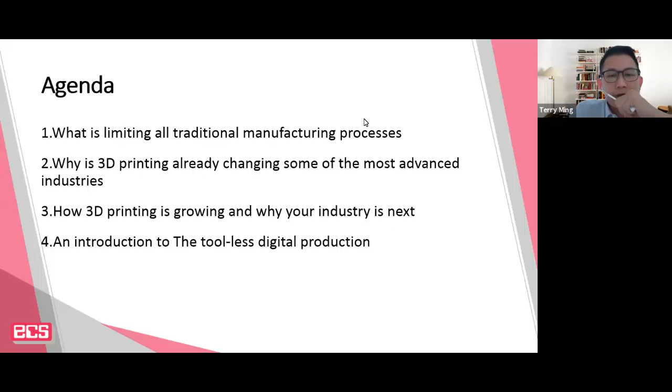Okay, nice. All right, so to begin, let me do a very brief introduction on the company profile. ECS has actually started since 1982, and we have been providing a comprehensive range of world-class CAD/CAM/CAE solutions to the manufacturing, aerospace, marine, and offshore industries, mold makers, and many others.

We started our 3D printing business way back in 2008. In 2017, we did a very drastic change - we restructured the whole business offering, focusing just on 3D printing. As I'm speaking now, in 2020, after 12 years of involvement in 3D printing, we have expanded our presence across ASEAN and started office operations in Thailand and Indonesia, as you can see on the screen.

Without further ado, together with me is Omar. He will be the presenter for today. He is an application engineer who specializes in assisting customers across all industries to integrate additive manufacturing into their current workflow. Okay, over to you, Omar.

All right, okay. Thank you, Terry. Thanks so much for the introduction. Good morning everyone, hope you're doing well. So as Terry has mentioned, we will talk in this webinar about 3D printing and how it's changing the way we do things.

It's very good that we did the poll in the beginning, and we thought about starting from the basics, trying to understand what 3D printing is, trying to understand how it came about, and what makes it different from most traditional manufacturing processes, and why people talk about it these days. It's good that the majority have a basic understanding of the technology, and this is very understandable - at the end of the day, this is a new technology.

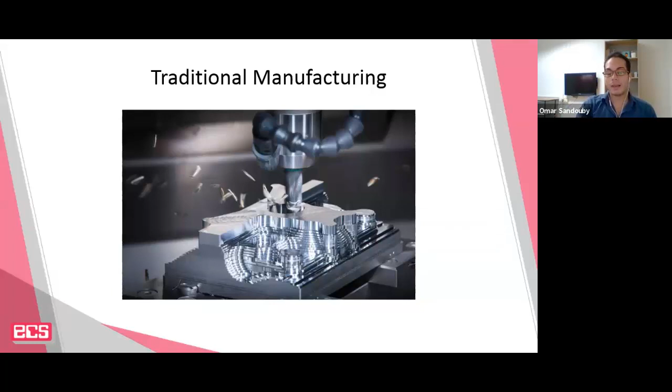So for me to better define what 3D printing is, we have to first understand how manufacturing or mass manufacturing is being carried out, what processes are being used, and what shortcomings we see in the manufacturing industry that we can find a place for 3D printing to complement and overcome. If you were to talk about traditional processes, I just listed here 4 of the main ones that we see in many industries.

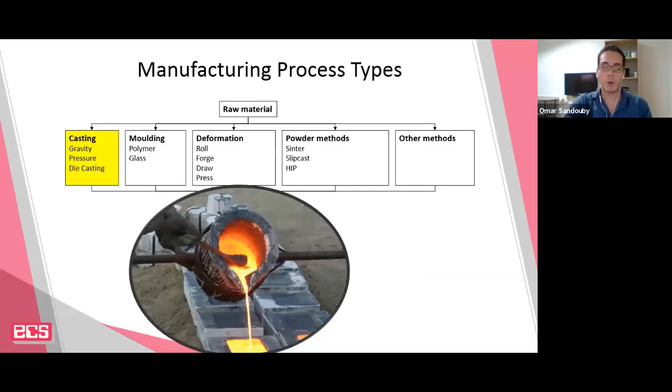For metals, we do something such as casting, whereby you pour the liquid molten metal inside of a mold. For glasses and polymers, we mostly process them by molding, whereby you build those molds to create the shape. Then sometimes we have to do something such as deformation - processes such as rolling, forging, drawing, or bending.

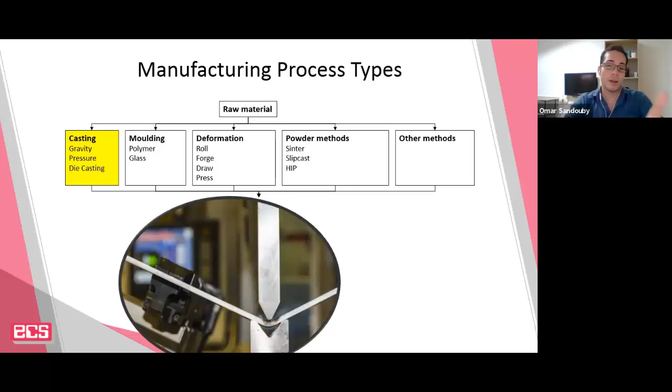And sometimes we also use powder, again used in metal. This is important, and that's why I have it here, because we'll come back to that later, whereby you create the shape in powder and then you sinter that inside of a furnace.

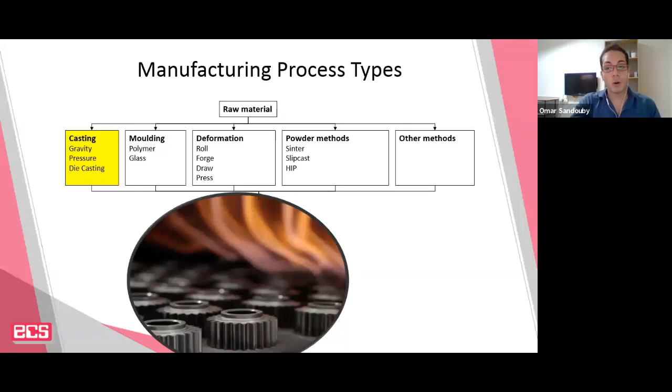But this is just the primary processes that we do in most of the traditional manufacturing processes. Of course, there are many other processes, but those are the commonly used ones.

So after that, we have a very famous one, which is machining. In machining, you need to cut the part, maybe drill it. So in case of, let's say, smartphones that have an aluminum casing, once you have the rough shape, you have to do machining.

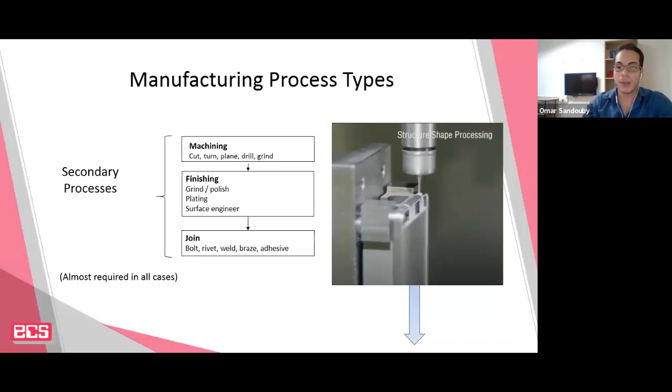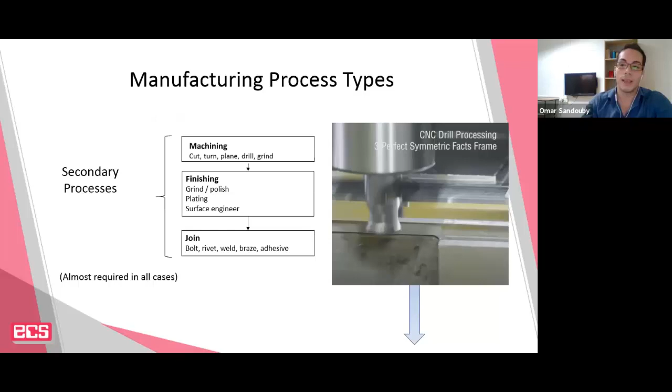And then after that, you start to do finishing. A bit of grinding, maybe plating - all of those steps are needed for you to attain the aesthetic requirements of the part, of what the consumer product would look like, as well as to attain the mechanical properties that make this casing functional.

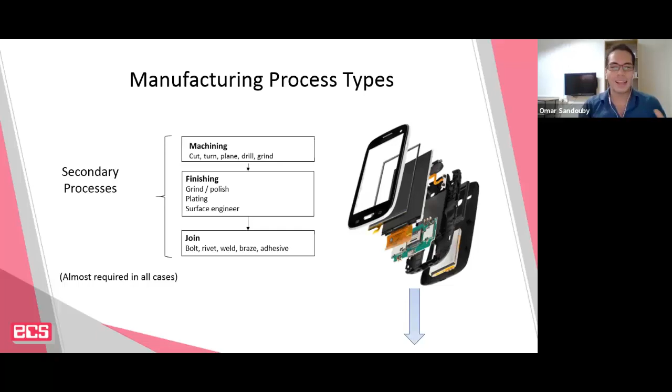Of course, any mechanical components are being manufactured separately, and then you have to go on and join them all together in what's known as assembly. So roughly all manufacturing processes look something like this. If you're talking about plastics, metals, or ceramics, they have to be processed in a way quite similar to what we just highlighted.

If you think about the visuals I just showed, like the casting process or molding, maybe bending, you'd see that all traditional manufacturing processes, anything that we manufacture, have to utilize molds and tooling to create the geometry. There is no way you can create the specified shape of a plastic part without having a mold. You have to have a mold.

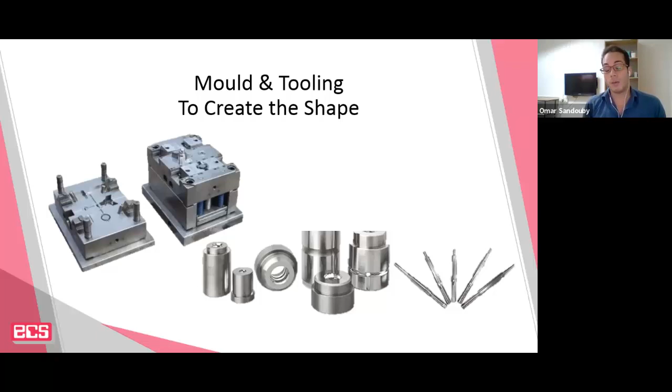So some may ask, okay, what are the issues with using mold and tooling? We've been using those for the bigger part of history. Any sort of manufacturing, even from early civilization all the way up until now, has been utilizing and capitalizing on molds and tooling.

Of course, mold and tooling manufacturing also became much more advanced. In the early days, milling machines used to be manually operated and the tolerances were not so great. Now we have state-of-the-art CNC machines that can go into nano machining, giving you very high precision with very tight tolerances.

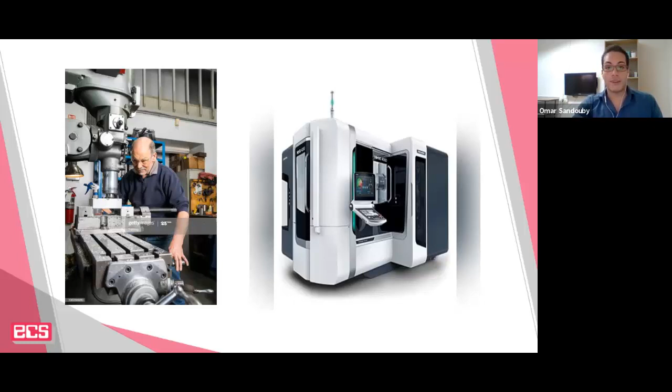So precision-wise, traditional manufacturing has expanded massively in this area, but there remain some constraints and drawbacks when it comes to molds and tooling. And those constraints, in turn, give you the same drawbacks for all traditional manufacturing processes.

Firstly, we have design constraints. We have the problem of longer lead times. We have another issue that tooling is quite expensive, and that leads to supply chain complexity. In the next slides, I will go in depth a little bit more into what causes those issues.

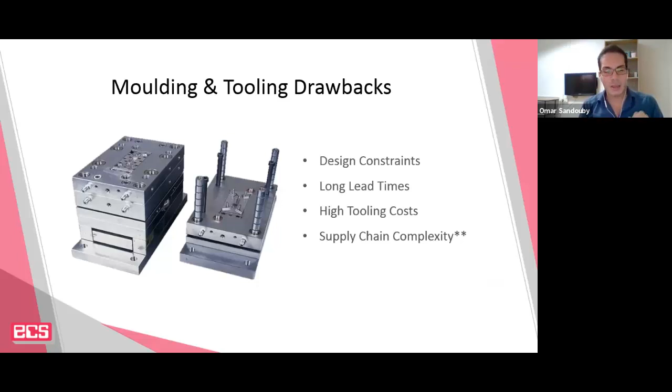When it comes to design constraints, if you were to do any mechanical engineering course, you'd have to spend at least 2 years to wrap your head around the idea of design for manufacturing and assembly. So if you're a designer and you have the best design in the world, if this design of yours cannot be manifested into something that can be manufactured and assembled together, then your design is no good.

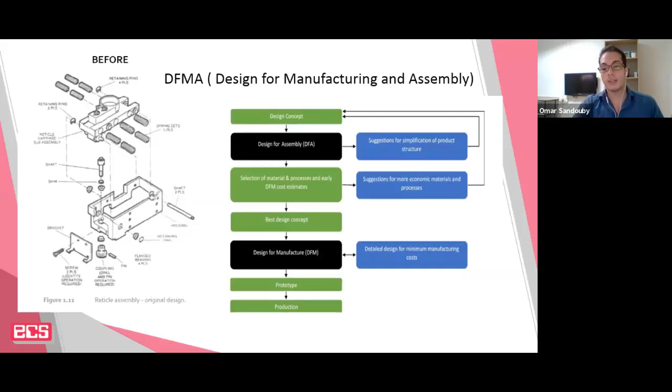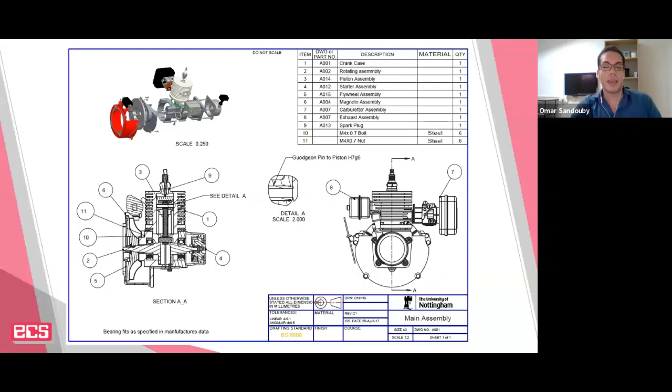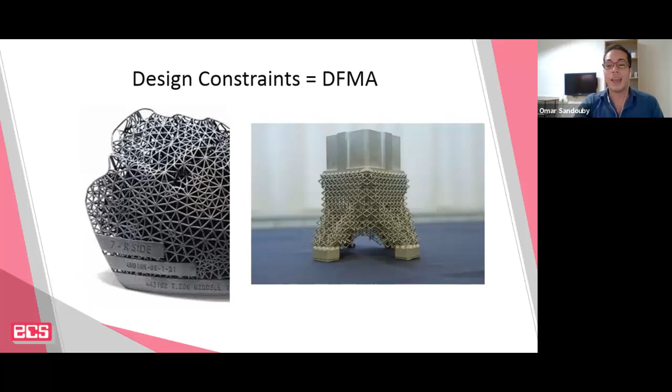And of course, this ability for you to do an assembly or to produce something manufacturable imposes a lot of restraints on your design. For instance, if you'd like to build a very complex shape, such as a topology optimized shape, there is no way you can do this with any traditional manufacturing processes, because at the end of the day you're restrained. You cannot machine, or create a mold, that would create such a complex shape. So this is where design constraints come about.

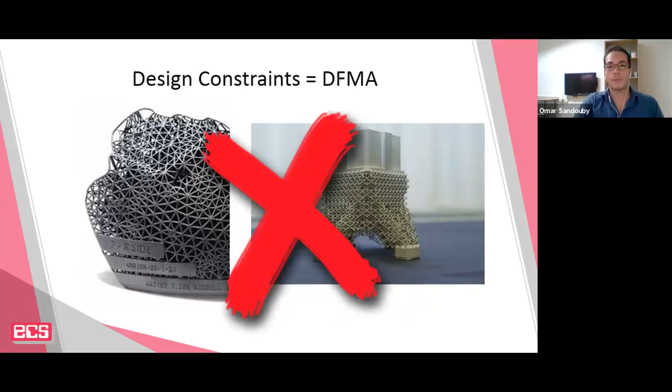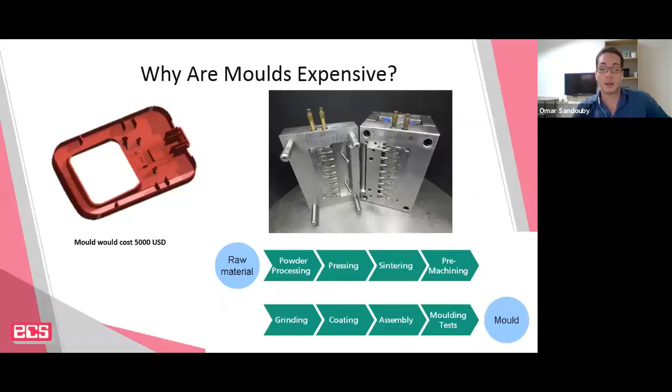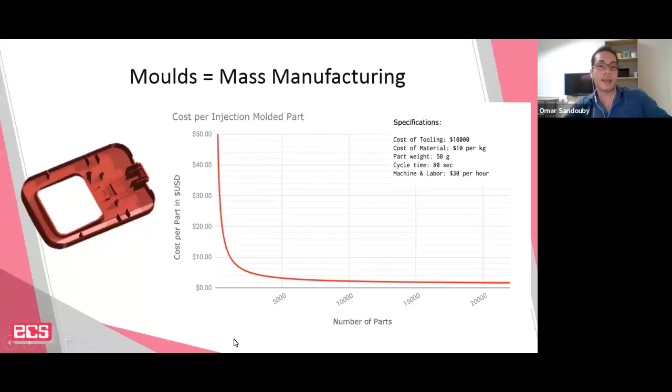So perhaps this graph is what you also see for many mass manufacturing processes when it comes to their pricing. You see this exponential decay. If you're talking about low volume production, the pricing per piece is quite expensive, and it's only worthy of going into full-scale production to attain the good, cheap pricing when you, in the case of this simple part, exceed the 5,000 part count.

And this is what the composition looks like to make it cheap. This part can, based on the information you can find, cost you maybe around $6.40, and you see that the cost is predominantly that of the mold. It's only worthy for you to go into injection molding when you talk about 500,000 parts. Only then do you see the drastic change, with the part price reduced to almost 40 cents.

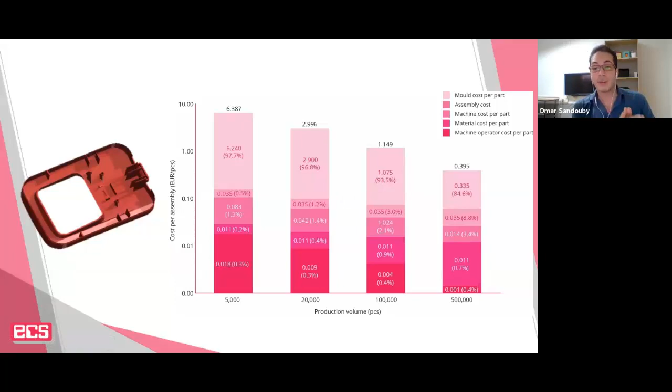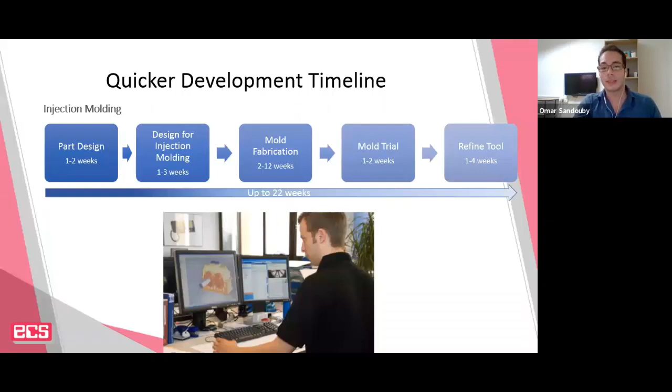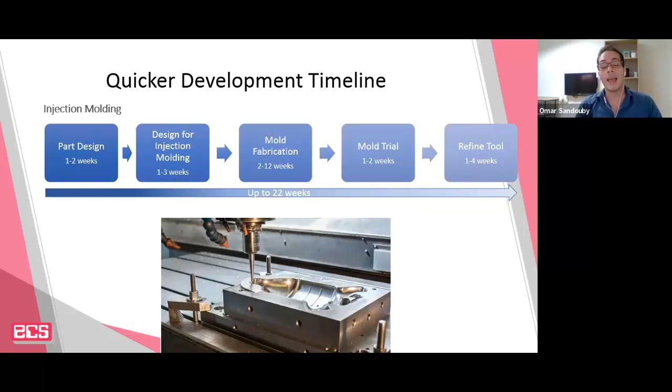And then that's not all. You have to design the mold. This is a more complicated step for you to take. Then you start with the mold fabrication. And we've seen the steps. You start with powder, you start with machining. It's a manual, labor-intensive process, and it's quite expensive.

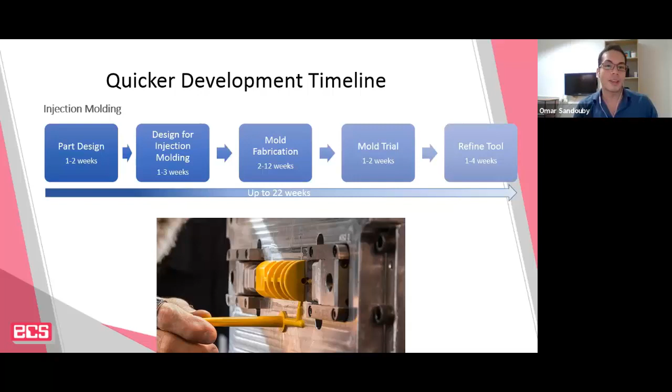Then you start to do some trials, because in many cases, when you go into injection molding, the shape that you create is actually created by the tooling and not created by the part design. So the shape can have discrepancies between what comes out of the mold and what your customer has in mind. And this opens the door for iterations or refining of the tool. So you need to undergo many iterations or do some adjustments.

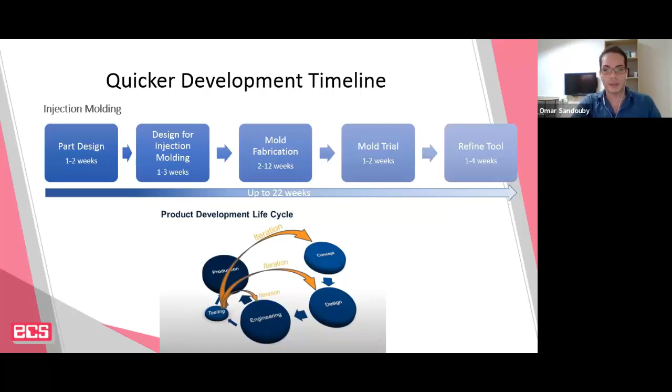And in some cases, you have to maybe throw away the mold that you've built and start building a new one that costs you maybe $5,000 again. So the whole timeline to develop and run a project in injection molding, if we're talking about a complex part, can take up to 22 weeks. And this is quite a lengthy time. Everybody knows that if you want to go into injection molding, this is the lead time you're talking about. So we've seen some of the issues that come about in traditional manufacturing.

So what about a process known as 3D printing? This process starts off in the very same step as any traditional manufacturing process, or in this case, injection molding. So you need to do a part design. And from there, once you have a 3D model CAD file, you can directly print. All you need to do after that is some minor post-processing, which in plastics can take maybe 1 to 2 hours.

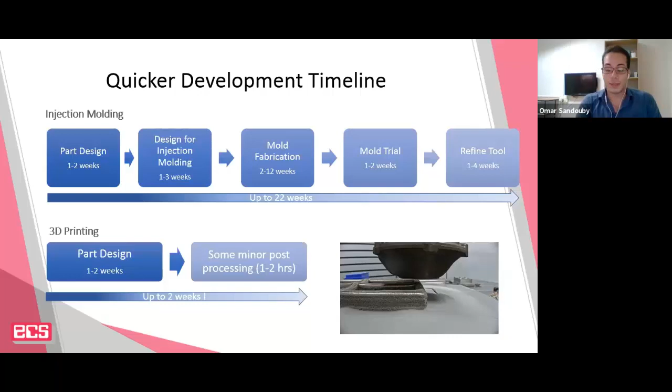So just to give you the book definition of what 3D printing is: it's known as additive manufacturing because it prints or builds a part layer by layer in an additive process. Right now in 3D printing, we have the ability to use metals, plastics, ceramics. So most of the commonly used classes of materials that we have can be 3D printed.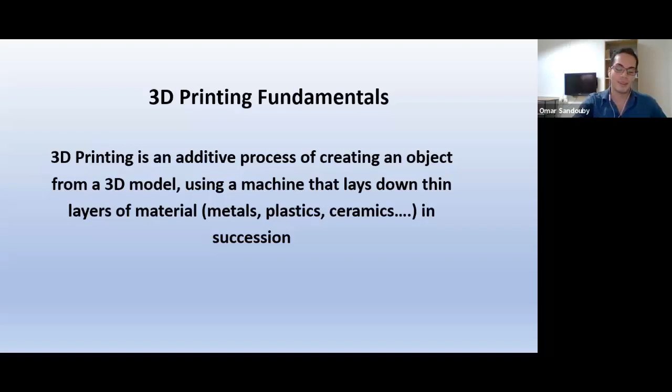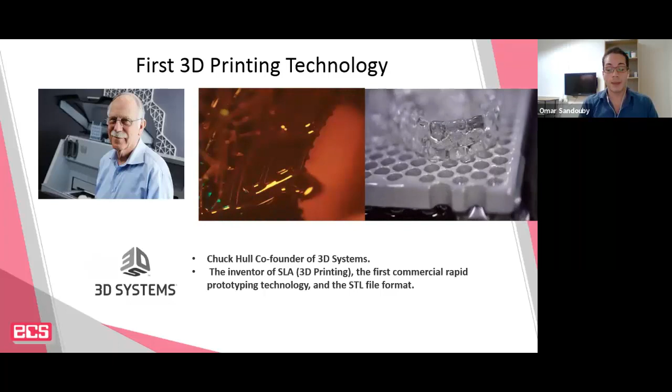Perhaps we have to also talk about how 3D printing came about. The idea of 3D printing was first introduced, I guess, around the mid-80s by this guy here named Chuck Hull. He used a thermoset, which is liquid resin, and cured it with light to be able to create the shape layer by layer.

So how did it come about, and what actually inspired him to go on and do 3D printing in the first place? The industry at the time did not have a similar technology. And what inspired him was how hard it was for designers to go on and do any prototyping.

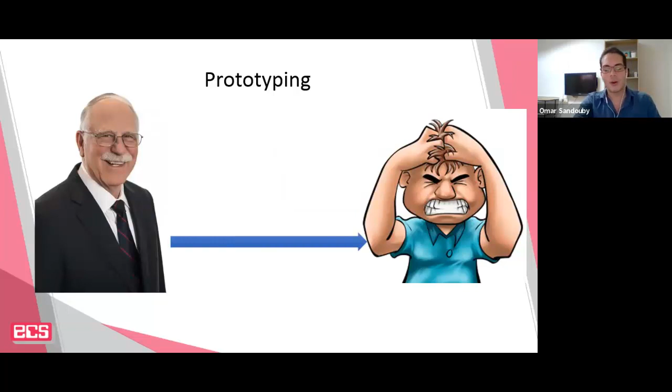We've seen how hard it is, it takes maybe up to 22 weeks to run an injection molding process. Imagine you're a designer and all you need to do is come up with some different concepts, physical parts, to do some verification before you go into production. It doesn't make any sense to go and run an injection molding program just to get those parts, because that part will cost maybe $5,000, $6,000, depending on the mold.

So what designers used to do back then, and Chuck Hull used to be one of those designers, he used to work in a furniture company, is he would need to go down and get the styrofoam and start machining it, or using whatever subtractive techniques he could, and add a bit of color so he could manifest those concepts into an actual product.

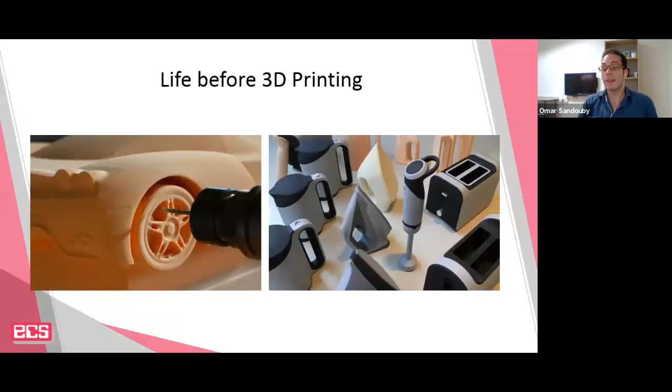Now, the process was very lengthy, very tiring and hectic. And therefore, Chuck Hull said, okay, now we have 3D models. That was about the time that 3D models and the idea of CAD-ing started to appear with computers.

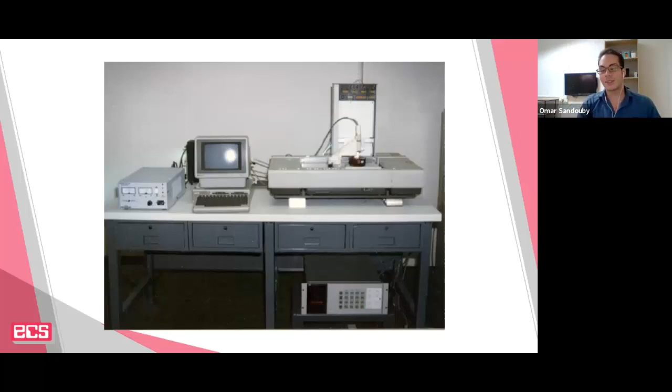So he thought about attaching or building this SLA printer, as you see in the picture, putting it next to his computer and starting this additive manufacturing technology. You might have come across those terms before: rapid prototyping, 3D printing, additive manufacturing. It's all talking about the same technology.

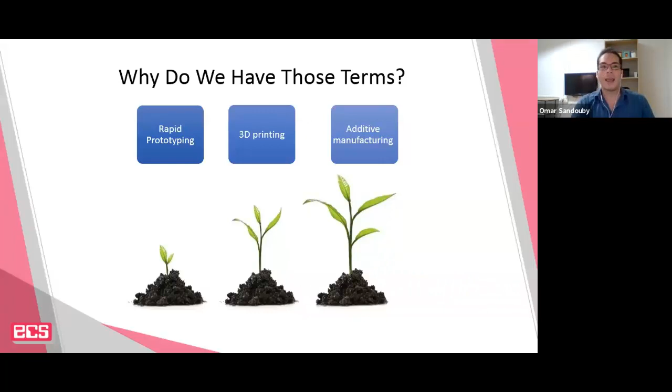For the bigger part of its history, from its first introduction by Chuck Hull all the way up until, I guess, maybe 2012 or 2013, it used to be known as rapid prototyping because it emerged for prototyping, and it was not intended to go into additive manufacturing or any manufacturing process. But what made this technology actually evolve, we will talk about later, and we will see why it's now a standalone type of manufacturing.

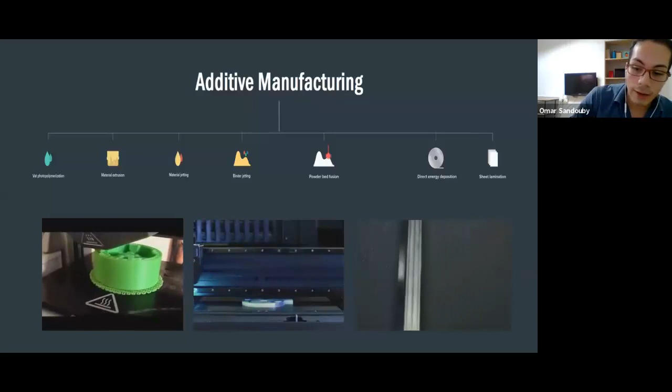3D printing has come a long way since the 1980s. We now have probably 7 main different technologies. Some use powder, some use resin, some use solid. I'm not going to talk in depth about the differences between those technologies - things like material jetting or powder bed fusion. We'll keep that for a future webinar, because every single one of those technologies complements 3D printing in a way and has its uses in applications. For this one, I'll just focus more on the toolless digital production coming up next, which uses resin printing.

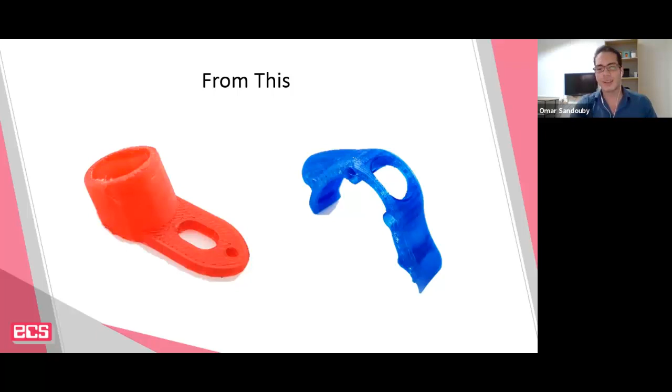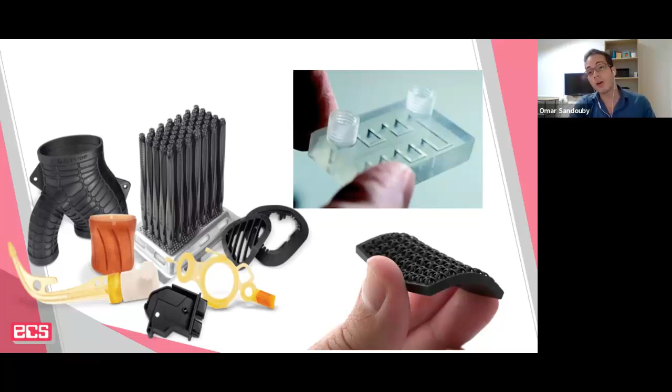So the whole suite of technologies in 3D printing was able to transform it, taking it from a place where parts used to look like this - not very nice looking, couldn't go into much engineering related fields - to parts that are functional and can go into very advanced solutions. You see here things such as microfluidic chips that go into the medical industries, or textured parts that look like injection molding. The technology has come a long way in the past 30 years or so.

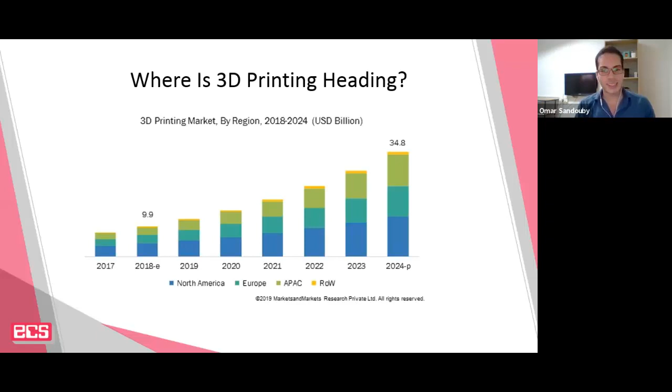This is also represented by how we see the total revenue of this industry growing. In 2018, it was reported to have a revenue of around $10 billion, and it's now projected to go up to $35 billion by 2024. So in just 6 years, you're talking about more than 300% increment.

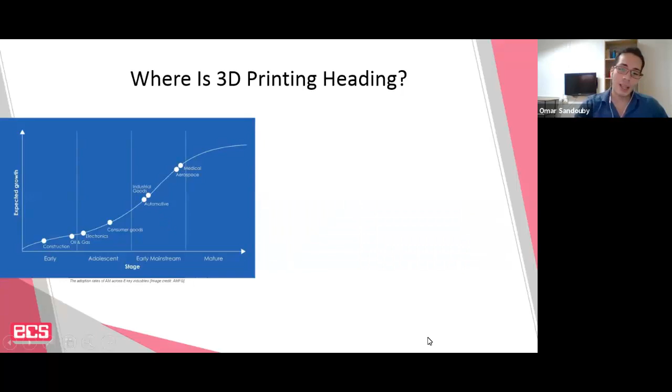That's a massive number, and I wouldn't say the technology is by any means mature when it comes to its adoption in different industries. But we're starting to see better trends in advanced manufacturing technologies such as aerospace and medical. We can also see good adoption in automotive. It's not uncommon - and this is quite recent, from January 2020 - that Boeing, or GE, which is also one of the big players now in the 3D printing realm, have 300 3D printed parts inside their latest engine, the GE9X that goes into the 777X.

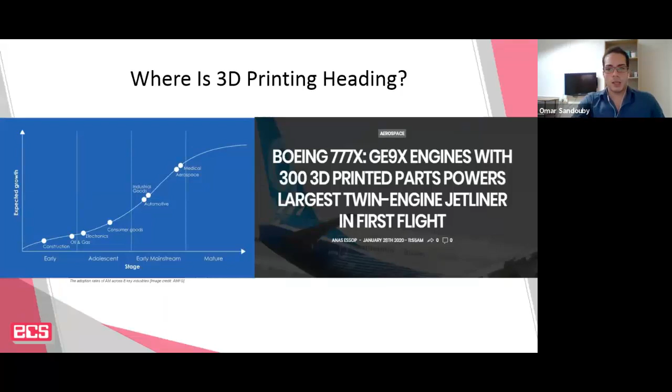So what makes 3D printing lucrative and attractive for those advanced manufacturing technologies? Perhaps the way I see it, what makes it quite important for them is that they can finally break out and remove the restrictions from design for manufacturing and assembly that we talked about, and utilize what is now known as design for additive manufacturing - the ability to design the part for its specific purpose.

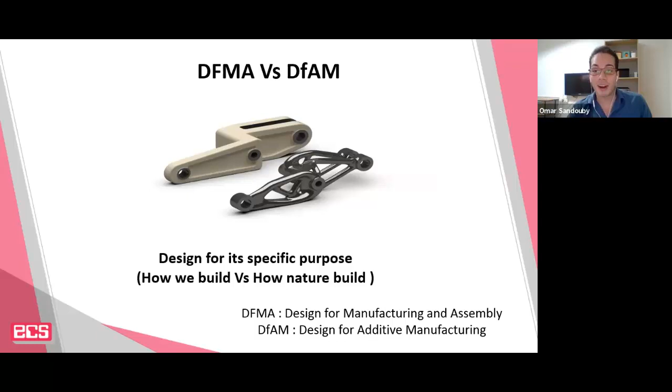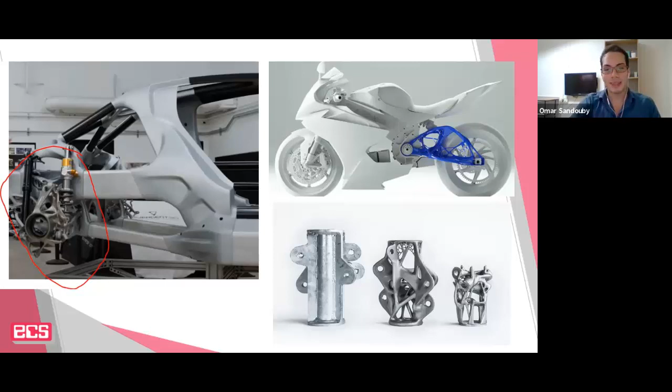The same trend is now being used in automotive and motorcycles - again using topology optimized structures that mimic what is known as how nature builds, in a way. Nature builds differently than how we build in traditional manufacturing. If you think of trees or our bones, for instance, they are extremely light - hollow from the inside, yet quite strong. The ability to print those structures - only 3D printing or additive manufacturing is a technology that can be used to attain such complex structures.

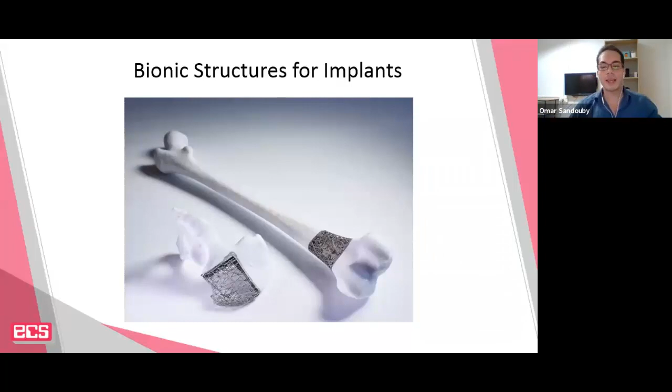And we see this in medical implants, whereby the parts or the bones that you build mimic what we have inside of our bones and have maybe lesser rejection rates for patients. And that's why generally we see aerospace, medical, automotive starting to utilize 3D printing.

So what about plastic parts? It's true, the technology actually emerged in plastic manufacturing. The very first technology we had was SLA, which uses a laser to cure liquid resin. But in my opinion, the technology didn't have much impact when it comes to production of parts. It's always been stuck at the prototyping step. When it comes to production, people don't go around and use 3D printing. But this trend has finally changed very recently.

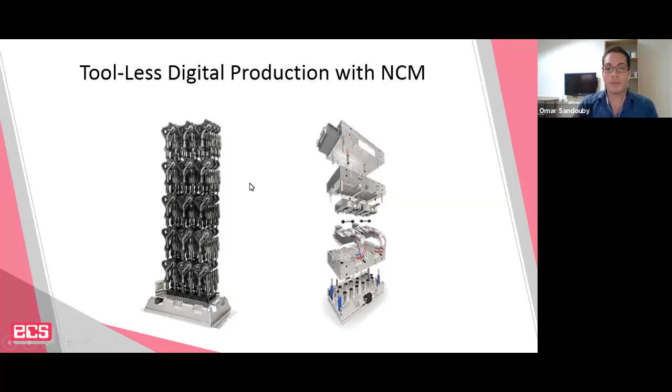Now we have something known as toolless digital production. That's the main trend I want to talk about today. It's the ability for you to stack up parts, build maybe hundreds in a very few number of hours. This video would be a very good representation of what the technology is able to do.

So you see here, again, it's using liquid resin, and the parts are being pulled outside of that resin at a very high speed. All of those parts are actually injection molded-like when it comes to their properties. The reason we're still using resin on the Figure 4 platform, or the non-contact membrane technology, is that the resin, compared to powder bed based systems, allows you to have the looks and feel of injection molding. So you can have smooth finished parts.

We can also see that the manufacturing solution comes along with scalable options. You can have up to 24 building chambers all running at the same time. So imagine if you have just 10 building chambers, you can print up to 1,200 functional parts in 5 hours. That's astonishing.

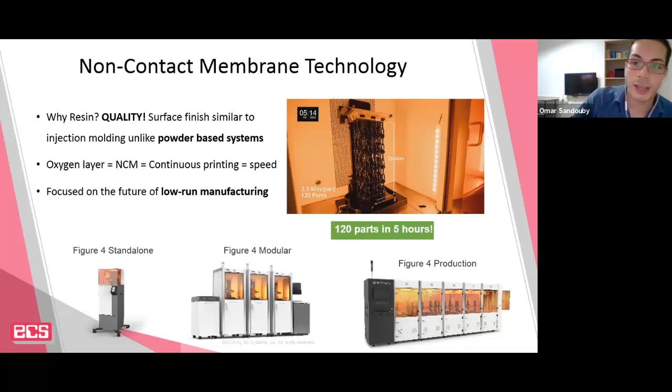And you may ask me, okay, was it just speed that was limiting this resin technology from going into production? I mean, we've had it for 30 years. You could say, okay, sometimes you need to roll out a product in limited edition, you might just need to have 50 or 100 parts. So why were not people using resin back then?

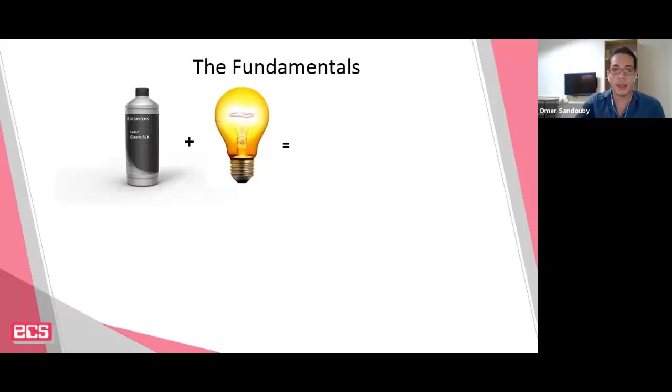The reason for that is that the fundamentals of how any resin printing technology works is pretty simple. You get a liquid resin, you cure it with light, and there you have it, your physical part. So the chemical reactions look something like this: the chemical compound of the resin would have those monomers, oligomers, and then the whole reaction is initiated by UV light to create interlinks between the photoresin that allow the part to solidify.

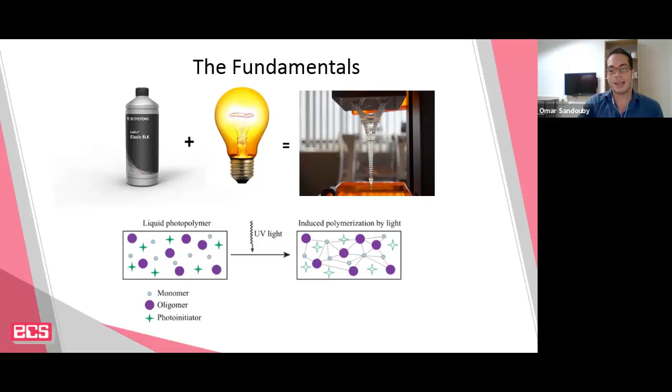So this perhaps is a good analogy, same as maybe the sun and our skin. A little bit of sun is good, allows us to grow, gives us vitamins, but extended exposure to sun is not good. Same thing for parts that are built with resin. If you've printed a white part before, you tend to see the part decolorize, turn a little bit yellowish after some time, after maybe a few months. The reason is that extended exposure to UV degrades or weakens those links, and the part's mechanical properties start to degrade. So the part is not really very much reusable.

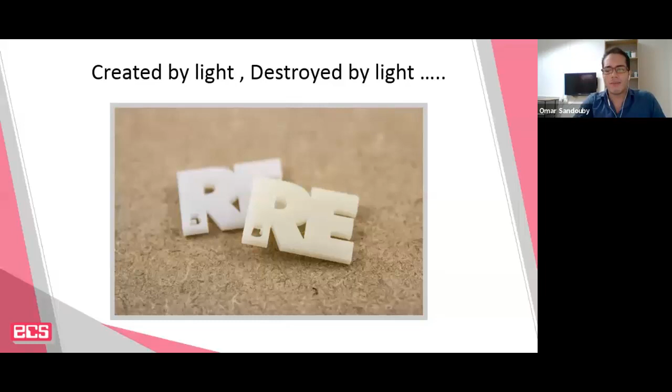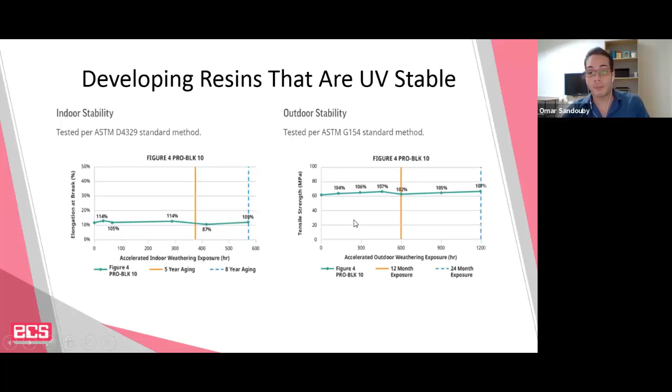But 3D printing now has evolved, and newer resins have been developed for this non-contact membrane technology. You can see here a good test whereby an aging process was done, looking at elongation at break, or tensile testing, at the 2 year, 5 year, and 8 year mark. You can see that the properties of those parts are holding up for up to 8 years of aging.

So you no longer need to worry, those parts are very similar to injection molding. They can go into most end-use applications.

And perhaps one of the good things about using this toolless digital platform is that the same printer can allow you to do concept and drafting, think of it as the very early stage type of prototyping, just to build the part and visualize it. Then you can also take it to the next step, you can have parts that mimic what you get on injection molding. So if you need to do functional testing, snap fits, some assembly, you can do that with this technology. Then it goes all the way to directly producing production parts, same as what we've seen in the video. So those parts are certified and can go into end-use applications.

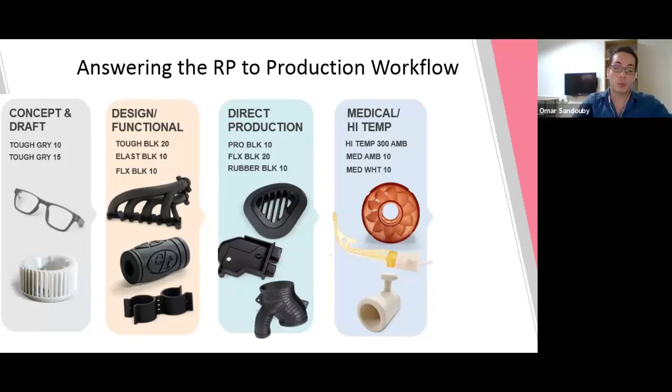3D printing can even go into more stringent requirement industries, such as medical. For medical applications, you have to sterilize the parts at maybe 100 degrees Celsius or above. Most resins developed up until about a year back didn't have the ability to withstand such elevated temperatures, but now it's possible with new resins that were developed.

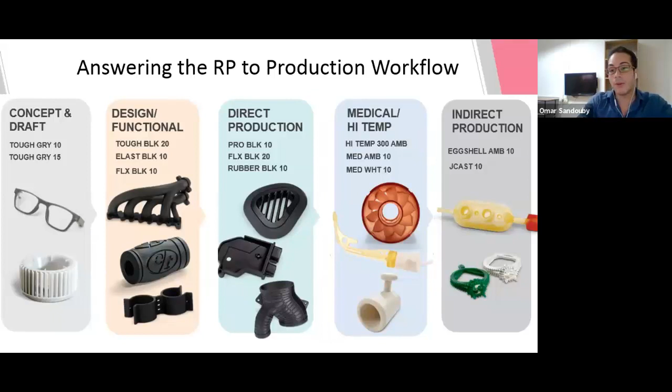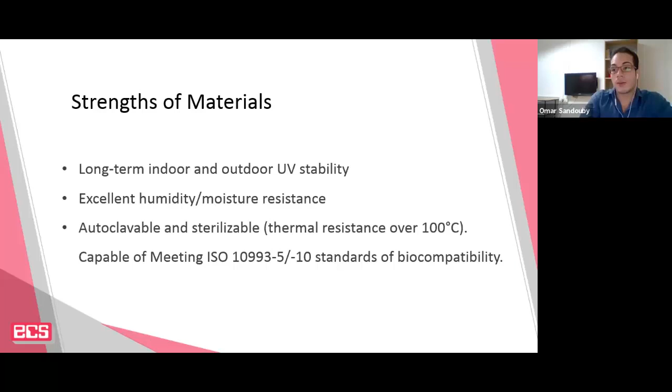You can also use it to do casting patterns, maybe for silicone or for metal, so you can see the flexibility that comes with this 3D printing technology. Some materials have excellent UV stability, can go into humid conditions, are ISO standard certified, and can go into thermal applications. So they're very similar to what you get with injection molding.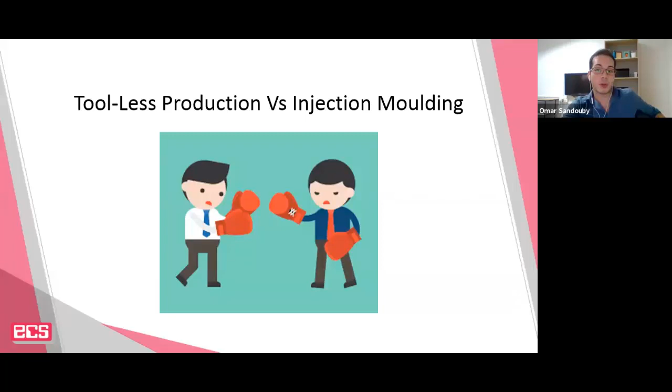A good question now is, comparing this to injection molding, what do the numbers look like in a direct comparison between toolless digital production and injection molding? 3D Systems ran this survey. They chose one part, like an AC vent for a car, and gave it to contract manufacturers who do injection molding, and they came up with this figure.

When it comes to tooling design, you no longer need to do that in 3D printing. No time is spent, and the labor cost to build the mold on traditional injection molding is around $4,000, compared to just $121, which was the money spent for a designer to prepare the file. In as quickly as 92 minutes, you can have the very first part ready for end-use application.

Compare that, and this is quite a simple part, to 15 days to get a part by injection molding. For 500 parts, the pricing per piece is actually cheaper than injection molding. It's only worthy to go into injection molding if you're talking about maybe 10,000 parts, where the pricing would be like $1.30. So with 3D printing, the pricing stays the same regardless of quantity.

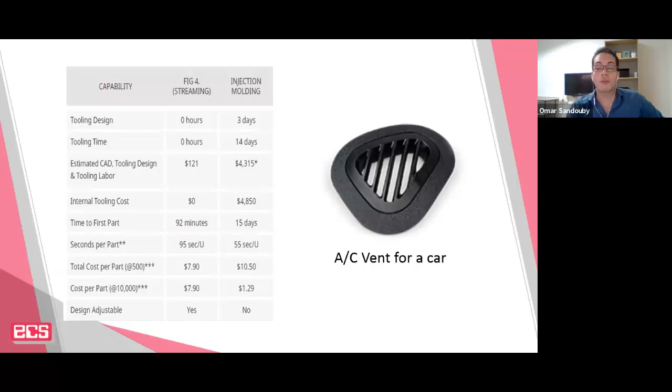You have the ability to adjust the design, customize it, and apply all sorts of different textures at no additional cost for virtually all parts printed. So the key advantages, to summarize, are lower costs. You no longer need to build tooling, employ someone to build it, and spend the time, resources and money. Overall it lowers costs.

It allows you to tap into the complexity of DFAM, design for additive manufacturing, that we've seen in aerospace and biomedical industries. Like those industries, you now have the flexibility to design unmanufacturable parts. It allows more customization for your customers. And this one is very important: the elimination of physical storage.

The supply chain of any traditional manufacturing process is quite complex, because traditional manufacturing is only worthy if you're talking about hundreds of thousands of parts. When you produce that many, you need to store them physically in a warehouse. But when you can print on demand, you no longer need to store any of those parts, you just print them on demand.

Another key advantage of using 3D printing in production is that many parts, especially aerospace parts, can be an assembly of 20 parts all reduced to one single part directly printed. We've seen in earlier slides how there's always a joining or assembly process, because mechanical parts come as a system that has to be assembled together. But in 3D printing, you can eliminate this step altogether and simplify the process.

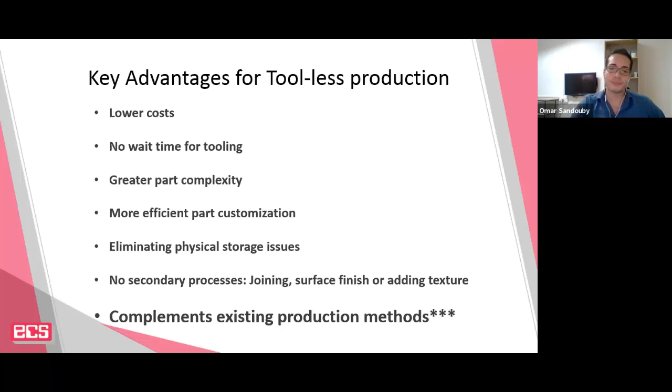I believe this is also important to highlight: this technology isn't just a standalone manufacturing technology, it also complements existing production methods. So you could be a contract manufacturer who only produces parts for a customer at, say, 1 million parts, and isn't interested in winning over the low volume quantity of 500 or 1,000 parts.

Because think about it, simple math - when you exceed the 500,000 mark, you're talking about 40 cents per part. So if you were to sell a million parts and cap it at $1, that's about $1 million worth of revenue. That's big money for contract manufacturers.

The thing about these days is that you're no longer just competing with your local rivals. We're living in a globalized world where your customers can go overseas to China, Philippines, Vietnam, or whatever country, and have the same project run over there for maybe half the price. So the only way you can win deals is by reacting fast.

That's very important. So I'll conclude this presentation by showing one case study we just ran with a customer here in Singapore - a medical company related to COVID-19, where they were engaged by one of their customers and asked to start producing thousands of parts.

But in the beginning stage, our contract manufacturer had to develop the design. So they came up with 6 different designs in this case, and needed to deliver functional parts as quickly as possible to test them on patients, so that if they developed the correct design and their customer was happy, only then would they sign the deal to go into production of 1,000 parts per day.

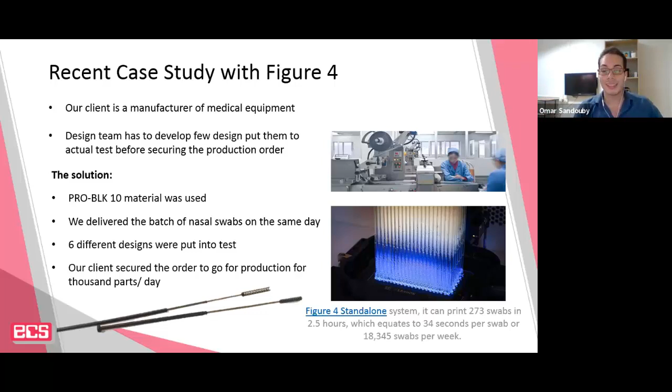And on the same day, once the design was verified and everything was good, they managed to close this deal and win the production order.

So this, I believe, gives you a bit of understanding of how 3D printing came about, where we see it in the industry, and where it complements some of the traditional manufacturing processes.

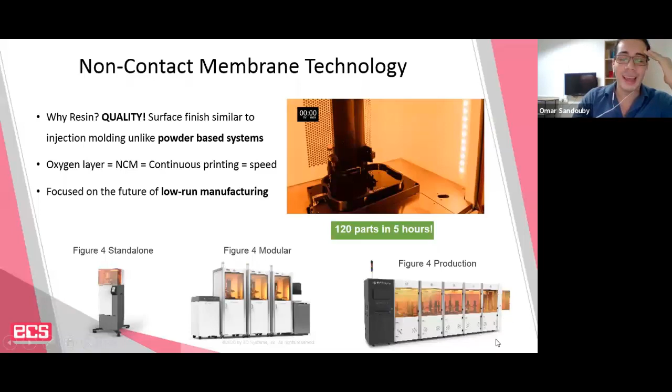This shows what I would think is a good manifestation of smart manufacturing in the future. The Figure 4 production uses robotic arms and one control unit that controls all the different building chambers. It's a hands-free kind of post-processing, with its allocated post-processing chamber at the end, so the whole production can run completely hands-free. You see the newer trends of smart manufacturing all represented in the recent trends in Figure 4 technology.

One more question here: can you elaborate more on indirect production? What do you mean by indirect production, and which printer will be able to do so, in your opinion?

Indirect production is, as you've seen, sometimes you might print a mold. In many cases, we see this quite often in jewelry and dental applications, whereby you create a casting pattern in casting resin and use this to do casting. Again, it's the same as comparing traditional manufacturing or injection molding to 3D printing - you can have the part printed very quickly, and you no longer need to do any tooling or rubber molds. I'll talk more about this in the future regarding how we use different technologies for indirect production. Worthy of noting, if you've come across Invisalign or dental aligners, those invisible ones are made by a process called thermoforming - an indirect production using 3D printing. There are many such cases. The Figure 4 allows you to do sacrificial molds, printing patterns, and casting patterns, all on this platform.

One more question: how do you determine when to opt for 3D printing instead of traditional manufacturing? Are there any cost modeling that we can refer to?